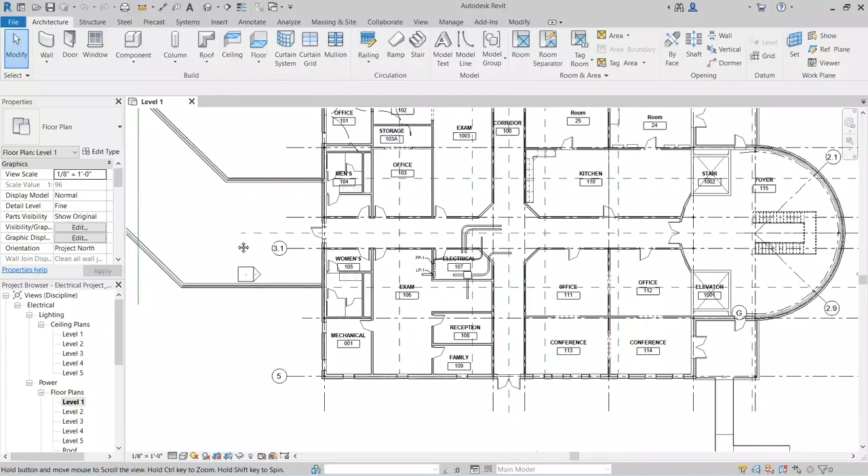I told you modeling conduit was easy, but let's look and see where we get all this conduit from and configure a new conduit type. In Revit, in the project browser under Power, Floor Plans, let's make sure we're in level 1.

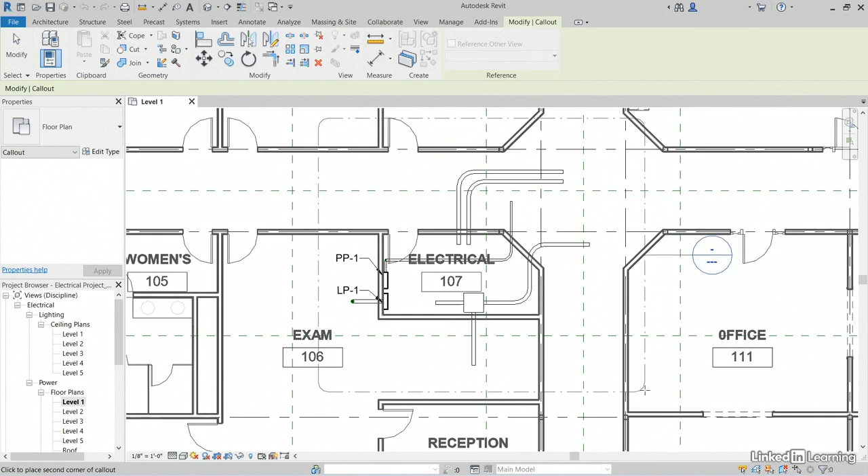I want to increase the scale of my electrical room here, so let's create a callout. Let's go to the View tab, click Callout, and pick a callout around this whole area here. I'm going to pick a point right here, drag my cursor down, and pick a point like right about here. I'm going to select my callout. Notice I have a bunch of grips that light up. I can grab this little grip right here and kind of move it out of the way. Hit escape a couple times.

Let's double click on that callout bubble. Let's change our scale. Notice that it's grayed out. That's okay. So in our properties over here, let's scroll down till we find View Template where it says Electrical Plan. Let's click this. Let's select None. Click OK.

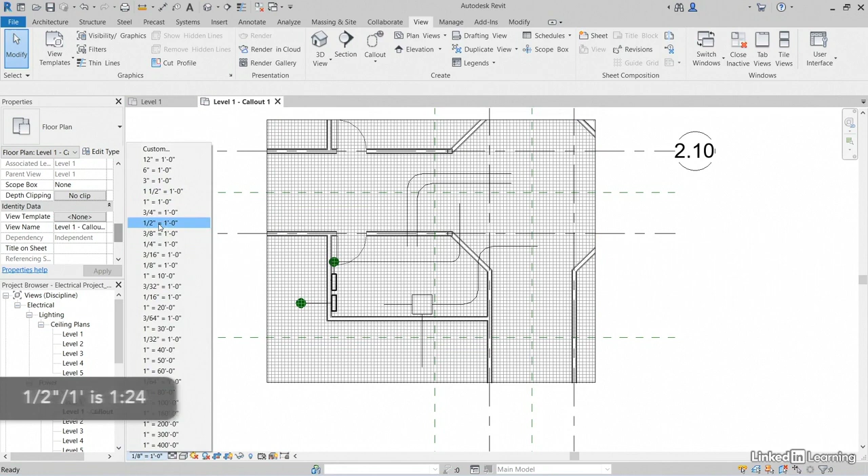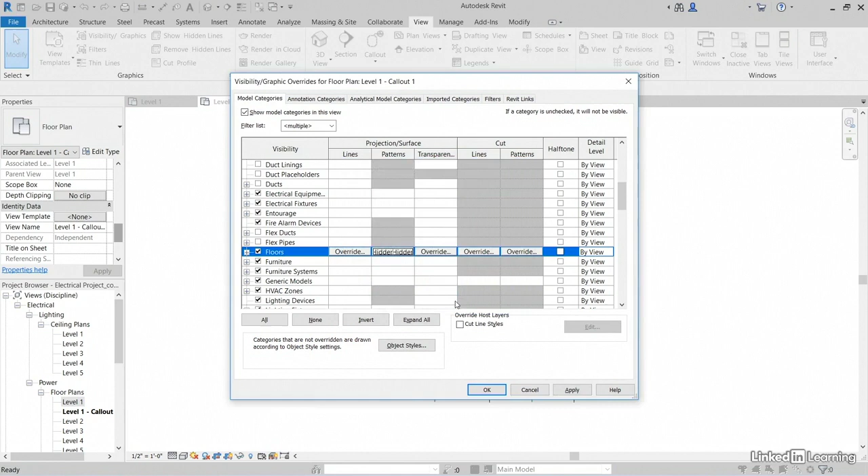Now let's change our scale from 1/8 inch. Let's crank it up to 1/2 inch. It's huge. Let's set our detail level to Fine. And let's type VG for Visibility Graphics. Let's find Floors. Let's click the Override for Patterns. Let's uncheck Visible for foreground and background. Click OK. Click OK. Much better.

We can even set our visual style to realistic. Yeah, it looks a lot better.

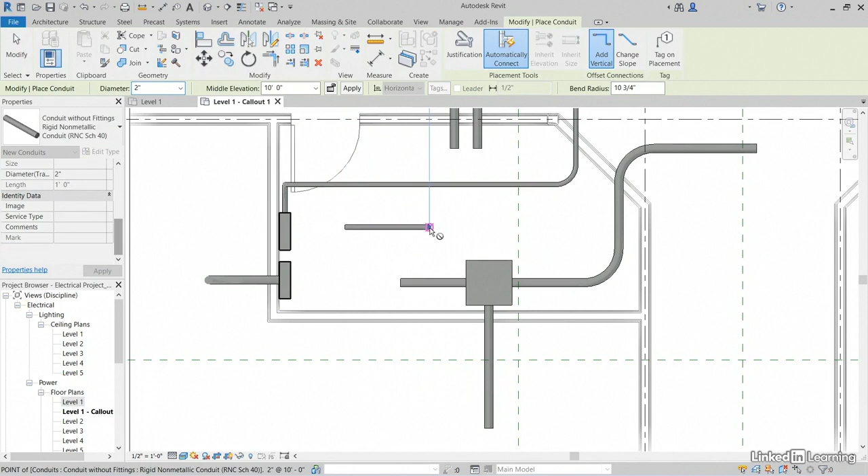Okay, now let's right-click on this 2-inch conduit and create similar. I'm going to pick a point right here, and pick a point right here. Hit escape a couple of times.

Now what I want to do is load in some families. So let's go to the Insert tab, click Load Family. I'm going to scroll out of this directory, go all the way up to my US Imperial. Again, remember, we can go back to Libraries - you can grab whatever your region is. I'm going to go to US Imperial.

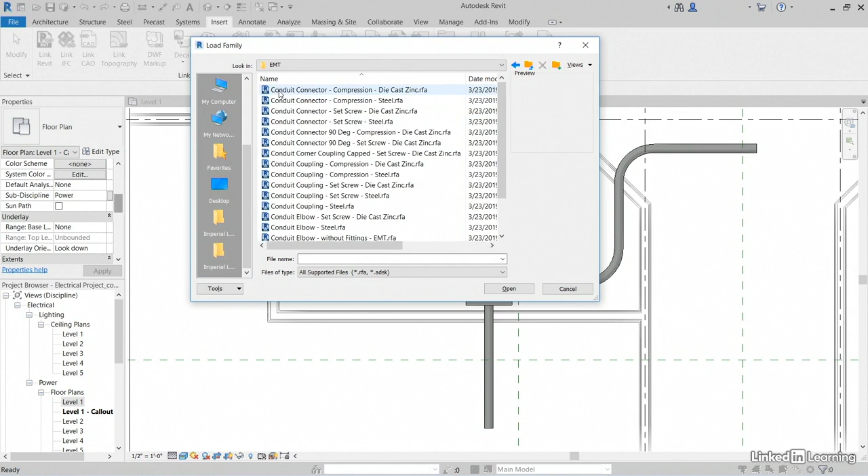I want to go down to Conduit, Fittings. I'm going to go to EMT. I'm going to come down and find Conduit Elbow, Set Screw, Die Cast Zinc. Click Open. Now let's select our piece of conduit here.

Let's click Edit Type. Notice that there are a few different types we can use. So I'm just going to keep this. I'm going to click Duplicate, and I'm going to call this EMT Set Screw. Then I think there's a little 2 there. Let's get rid of that 2.

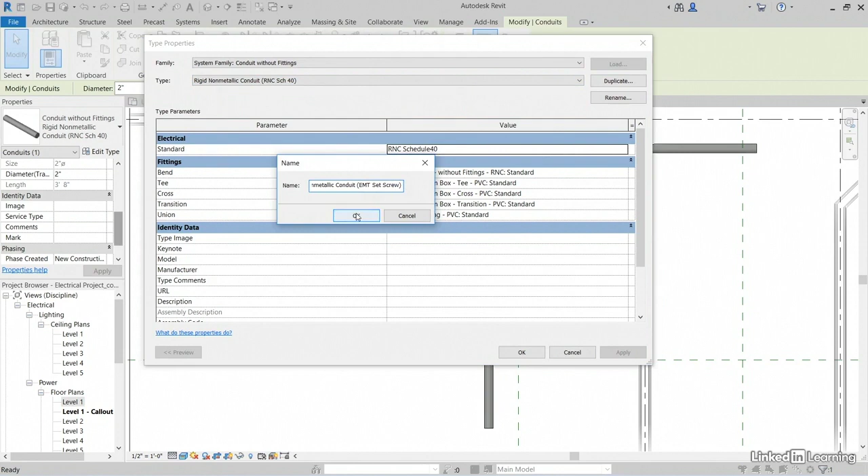Click OK. Now for the bend, notice for the fittings it has a bend. We'll click the drop down here, and let's grab that set screw. Click OK.

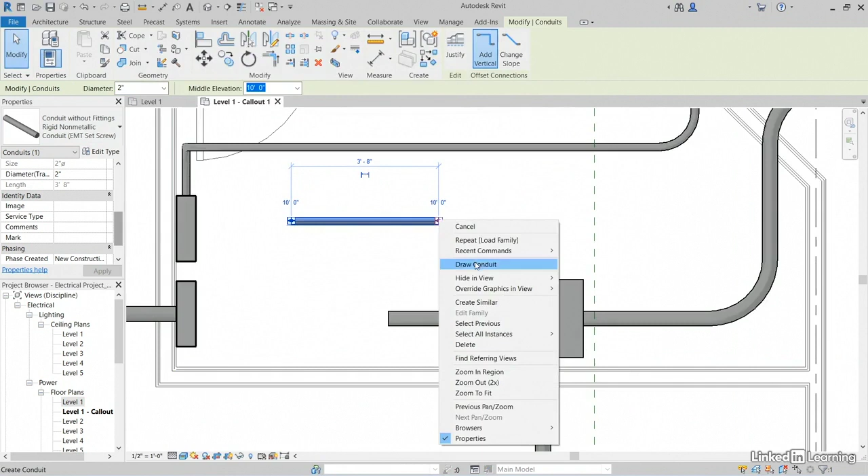Now this is the EMT set screw. So now if we right click on this grip and draw a conduit, I'll draw a conduit straight up. Notice it's going to pop in an entirely different fitting. So there you go. That's how you configure a conduit type.